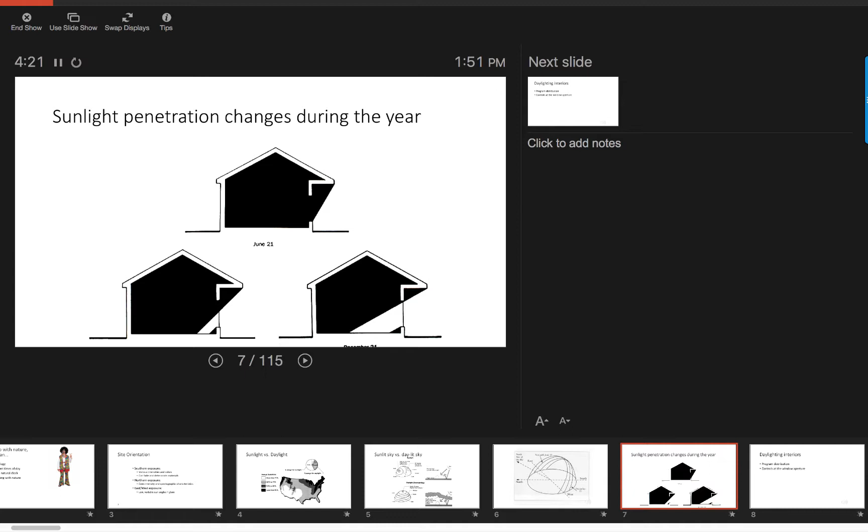So how does that affect the interiors? Why do we care about the outside of the building? We care about interiors. Depending on the configuration of your building, buildings can be designed to reject sunlight in the summertime and yet allow it in the winter by taking advantage of this change in altitude of the sun at different times of year.

The other thing is that when you are designing interiors, you have control over where the program goes and what happens at the window in terms of treatment. So, for example, and we'll do an in-class exercise on this, when you're programming a building, do you want a breakfast nook to have direct sunlight in the morning? And if it's an east or west facing window, would it be better to be east or west?

Because if it's facing east, you're going to get glare in the morning. That may actually be uncomfortable for a breakfast nook. Now, that said, that might be great for a dinner nook. So some thought would have to be given as to where you would distribute that piece of the program.

The other thing to consider, again, as an interior designer, you control the lighting. Hey, this is a lighting class. And there's a number of things that you can do, including switching where there are extra circuits by the windows, which shut off either manually or automatically if there's a daylight sensor that says, hey, there's plenty of light here.

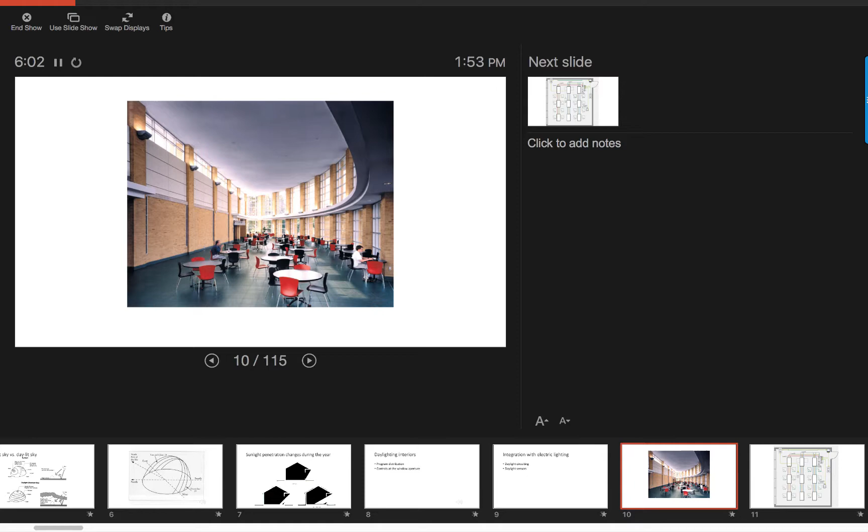Any corner of this space is adequately lit for whatever sort of activity might be going on there, which is mostly, it seems like, sitting around, munching or working on the computer.

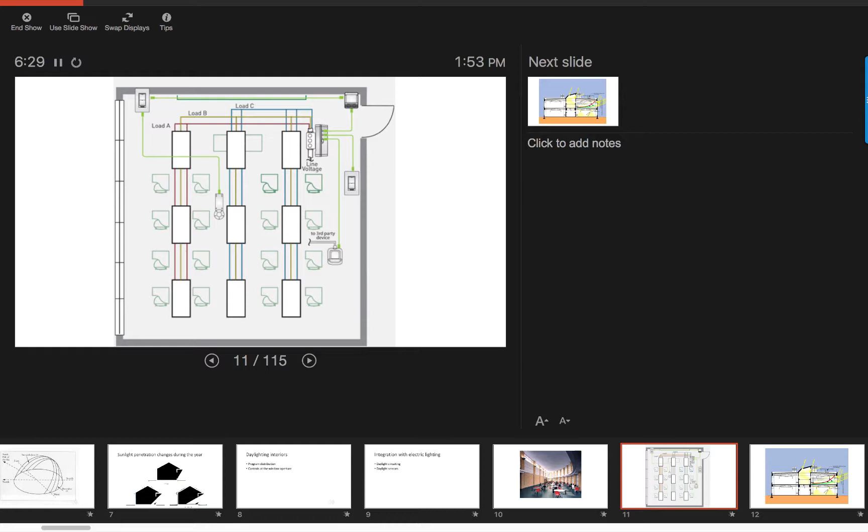So the dimming that I mentioned is typically called offset dimming, or daylight switching, you can call it that too, where you might have banks of lights on, say, 3 separate switches. One switch might turn them all on, and then one switch might turn off one circuit or another circuit. Okay. And again, those switches can be automatic or using daylight sensors.

Also, when you think of planning out a building, if you're getting into larger scale projects, things like atrium or atria are going to also be subject to the same sun angle issues. So any space facing on those atria, you'll have to really carefully study where is the sun going and how deep is it going to be penetrating into the building.

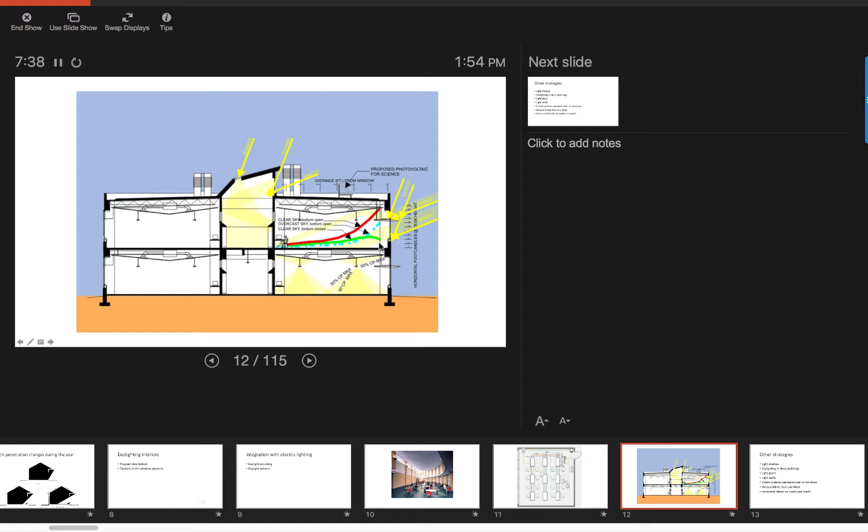Now, of course, the diagram dramatizes it, but you can calculate that, and this dashed green line represents actual calculated values of what you could expect at that particular time of year as for light levels. Obviously, it is still quite bright by the window, but can't avoid that because windows are just bright.

So anyway, there's a number of other strategies which you can use as an interior designer, which we'll look at here. These include light shelves. Obviously, skylighting is something that you can suggest as an interior designer. Of course, you'll want to make sure that you get somebody to look at the structure of the building before you start dropping in skylights willy-nilly. But it is great for deep buildings.

The example that I like that's convenient is Costco. They save a tremendous amount of money by skylighting, and they all use it as a rule. There's a couple of other things: light pipes, light wells, and then things like integrating the HVAC systems so that they run along windows and can act as, say, a reflector or to help in controlling the light.

Anyway, typically also when you're controlling light at the windows, vertical blinds are typically more effective on the east and west windows because they're better at cutting off those variable low-angle glare. Horizontal blinds on the south and the north are fine. Of course, you can use any type of blind on any window, but that's a sort of rule, or not a rule, a suggestion.

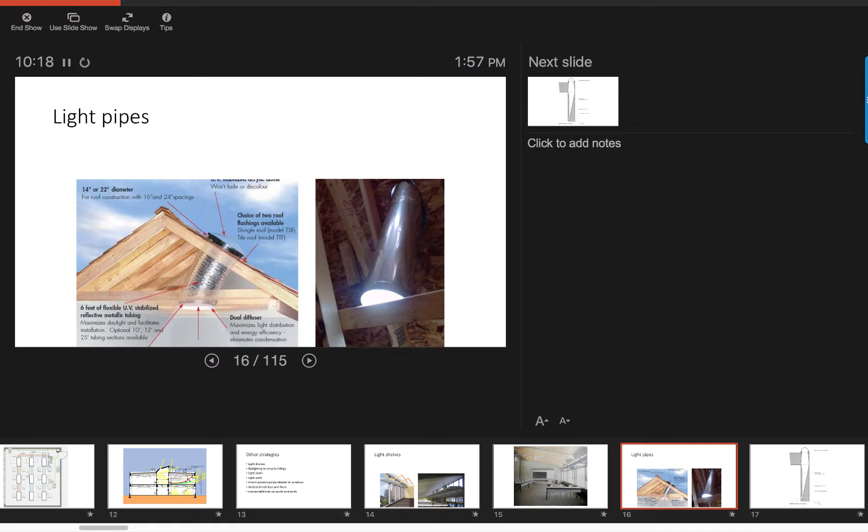So light pipes, they're just a product basically that you can buy. They fit in between the joists and the rafters. They're spaced to fit. And they're actually quite effective. I've used these in my own work, and they do a surprisingly nice job. What's terrific is when you put on an addition, say, and you've blocked a window to a toilet room, this can provide natural lighting in the toilet room. Of course, that makes you look healthier and is terrific when you're putting on makeup and other stuff.

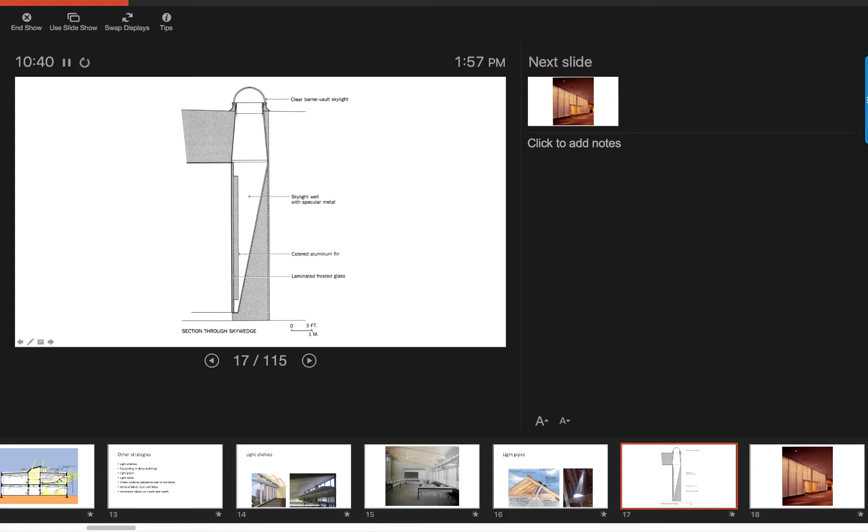And the advantage of this, in a giant convention center in Dallas or Austin or something like that, is that you get some variability. Even when a cloud passes overhead, the wall kind of changes, and it's a free, easy to install effect. You could even integrate electric lighting with this for nighttime. And then, again, like I mentioned, skylights.

I think we've seen these, and you can have fun with these, of course. And as I mentioned, integrating them with electric lighting so that you get a similar effect day and night.

One of the things about controlling daylighting, there are many methods. I've noticed that as you guys do your projects, almost nobody does anything on their windows, which is kind of sad because it's a big nightmare, frankly, or just a design opportunity. Of course, the glazing systems can help you in terms of the low E and all that. They can prevent heat or prevent heat loss. Glass coatings can do a number of things, including also prevent heat gain or loss.

But the thing that has the biggest impact on design is window treatments. Obviously blinds, draperies, shades, all those sorts of things. And what you don't want is the client to sort of add on some junky stuff after the fact. You really want to think these things through. If you're working with an architect, you can also discuss roof overhangs and awnings.

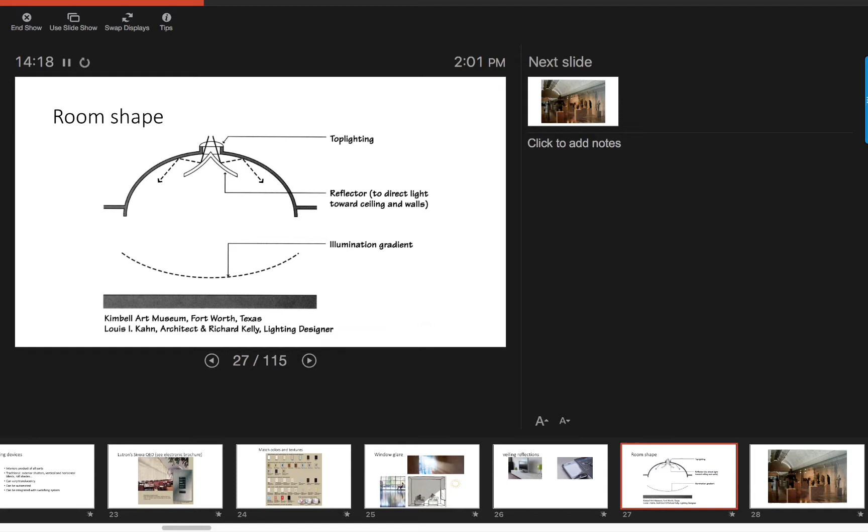This is the Kimbell Art Museum, the original one in Fort Worth, Texas, by Louis Kahn. A slot was designed in this barrel vault, and light comes through the slot and bounces off these scoops. So you get this kind of indirect lighting effect. In fact, it's almost like a double bounce. It bounces off of the scoop onto the arch, and then from the arch, or the vault, down onto the artwork. It's very nice.

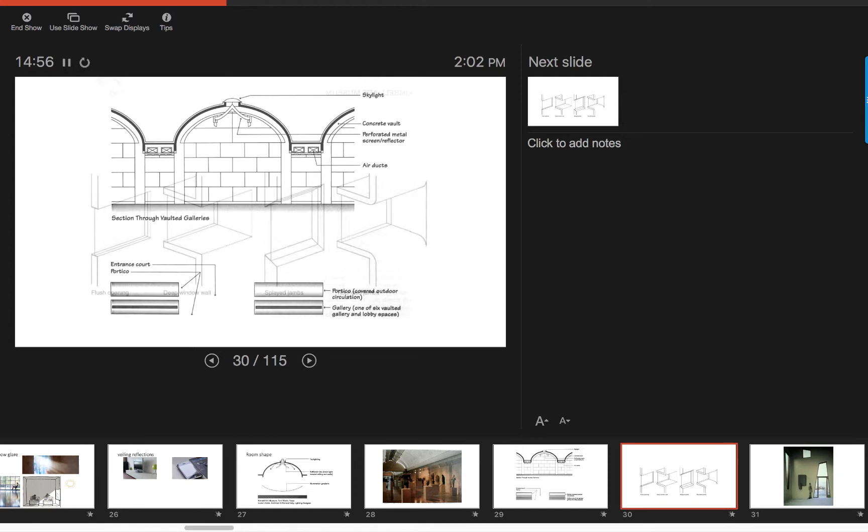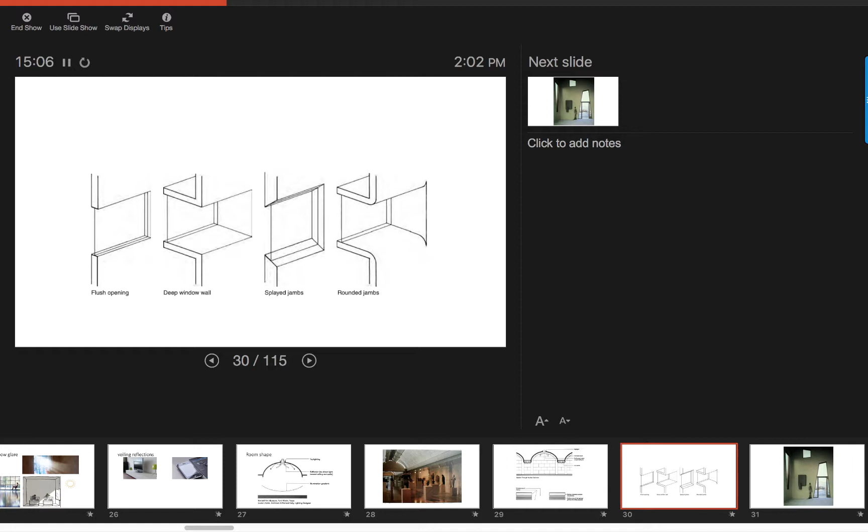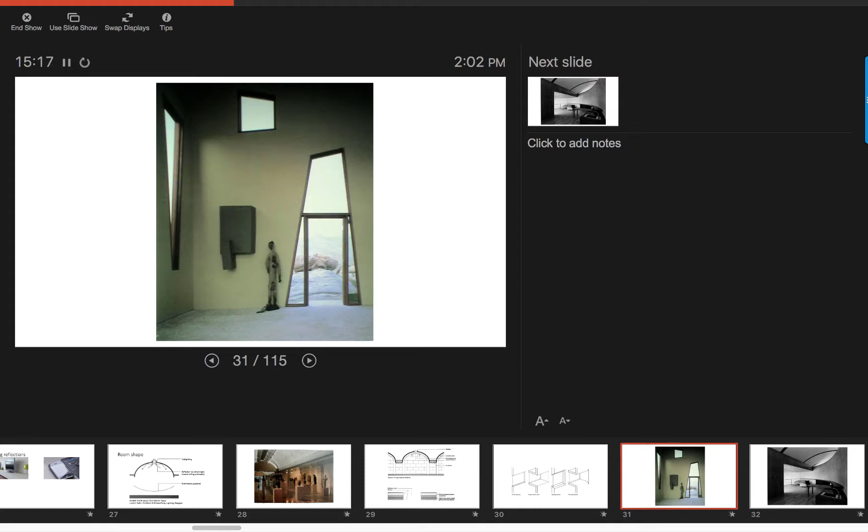They also did a good job in this design of integrating the HVAC into the overall planning. Again, when you think about lighting, you do typically think about HVAC because they're often happening up in the ceiling. Anyway, other things to fiddle around with, something like changing the shape of the aperture of the window. We can do this as interior designers. You may be stuck with the square window, but you can certainly have some fun with it on the inside of the building. And what's so magical about square? If you're working with an architect designing a new building, you can choose whatever sort of window you want.

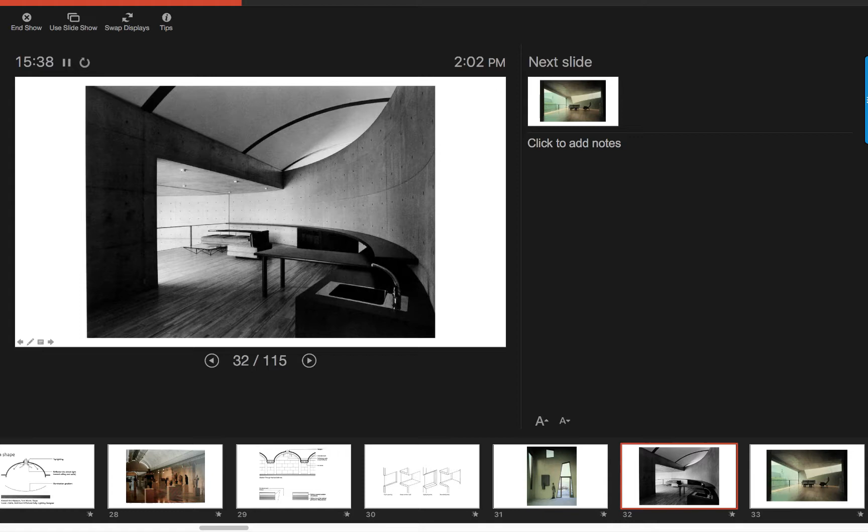And there's an architect named Tadao Ando, a fine architect from Japan who does a lot of work with daylighting. His spaces are super minimal. He designs them to have very interesting reflections and gradients of daylighting. The daylighting in his projects comes through these strange-shaped apertures in all sorts of different and unexpected locations. And there's usually some goal, either creating a shadow that's going to move over the course of the day or controlling a view through one place or another.

Whenever you're using daylighting, if you actually want to figure out if you're going to have usable daylighting, there's something called the daylight factor, and this is something you can calculate. And there's wildly complicated ways to calculate it, but you guys don't have to worry about that. All you have to worry about is the magic 2.5H. In fact, I'm sure that's going to be on the test. And because it's like the simplest formula you're ever going to see, H equals the head height of the window.

You have a 20-foot high window, 2.5H is 50 feet. That means that within 50 feet of that window, you'll probably have pretty decent ambient light levels from daylighting. As I mentioned, there's many other factors, especially the orientation of the building. But what this tends to lead to is the alphabet buildings.

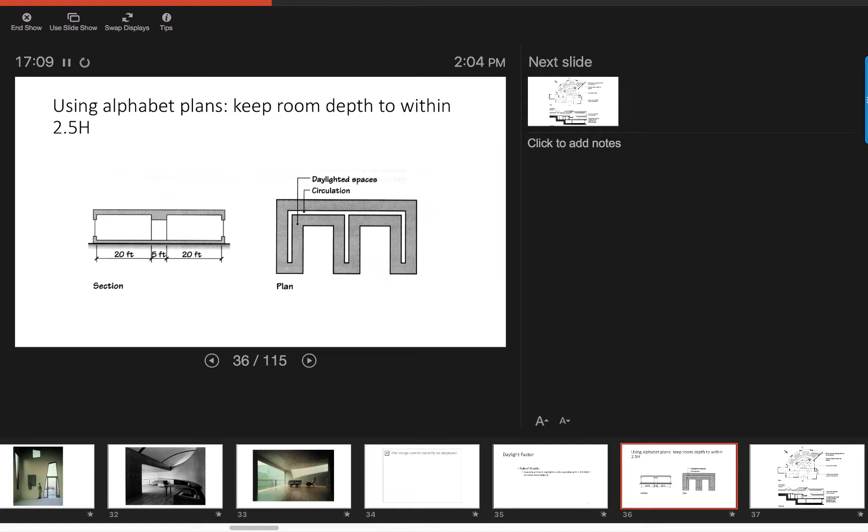And the reason that when you see old buildings that were designed for use with daylighting, they tend to look like a letter of the alphabet is because of the limitations of the 2.5H. Most of these buildings, if you sat down with a piece of paper, you could figure out they're all 2.5H, and they're all shaped like E's and L's and that sort of thing. Anyway, other people have used different ways of getting daylight deep into the building.

This is Alvar Aalto, and he has these daylight kind of cones, but he also has these very unusual scoops that are designed to work with the shape of the plan and kind of create interesting lighting that reflects throughout the space as the sun moves during the course of the day. The sun is going this way, and the reflections kind of spread it evenly in this fan-shaped space.

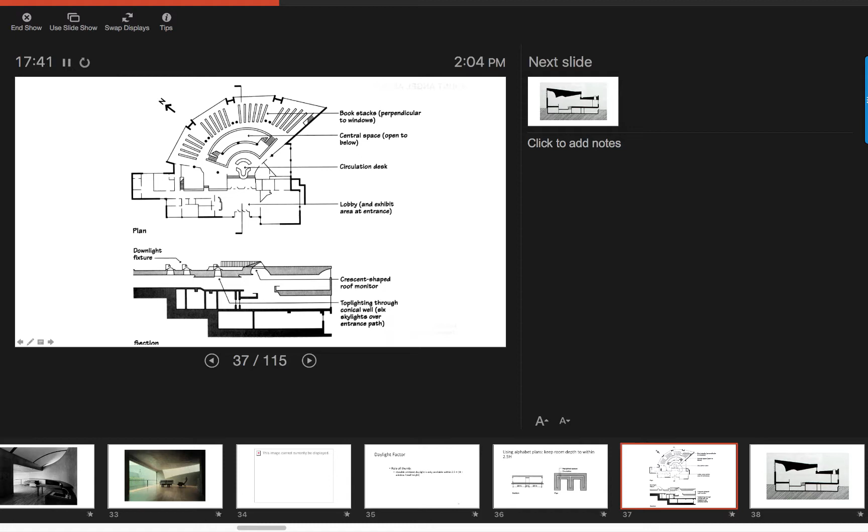And this is a section through those buildings, and you can see there's a kind of a parabolic effect. In fact, this is a double parabola. He also would do a lot of daylighting studies and kind of figuring out where the daylight would reflect. So anyway, just to take a look at one church as an example of a church designed around daylighting.

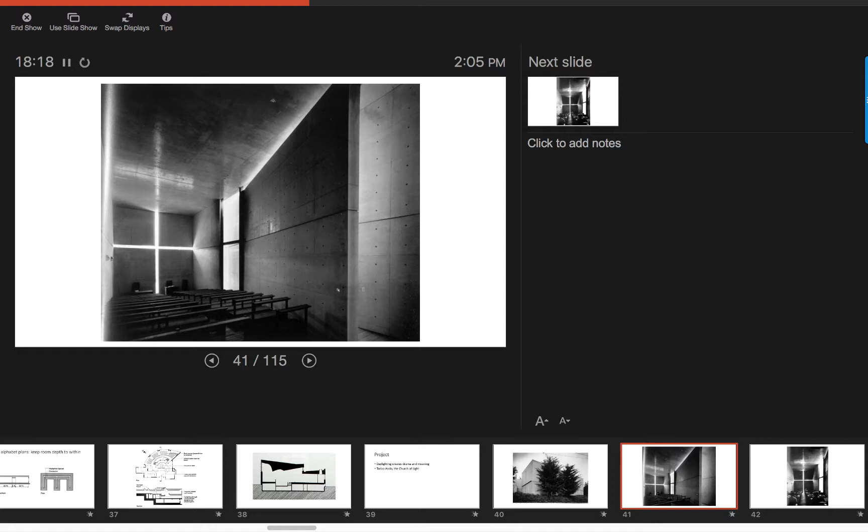This is Tadao Ando's Church of Light, and obviously those of you who are Christian might know that there's some symbology to the cross shape, and that's played on by making it a window. Obviously no stained glass in this particular tradition, but you can see it's just a very nice kind of symbolic, focus-grabbing use of daylight. And yet there's still enough daylight in the space to orient.

Basically, this space could probably operate without any electric lighting if needed, and it just highlights the geometry and the simplicity of this space. So, anyway, there's a number of terms that have to do with daylighting, which I won't go into every single one, but things to be aware of. And also be aware that when you are using daylighting, you can save money for your client by switching to daylighting, and these values can be calculated based on the electric rates in your region.

So let's chat about chapters 9, 10, and 11, which are historical light sources. Basically, we're looking at filament light sources, low-intensity discharge, and high-intensity discharge. And these, I'm actually gonna tone down the depth of the lecture here, just because we really don't need to talk about all of these lamps that much, other than to recognize them as historical.

But the things that we want to learn about these is, what kind of light output do they have? What is their efficacy, which is how much light do you get out of that source, and the color, the lamp life, other elements related to the lamp. The big thing is that as history has gone by from filament sources onto low-intensity discharge and high-intensity discharge lamps, it's all about increasing lamp life and increasing efficacy. Okay.

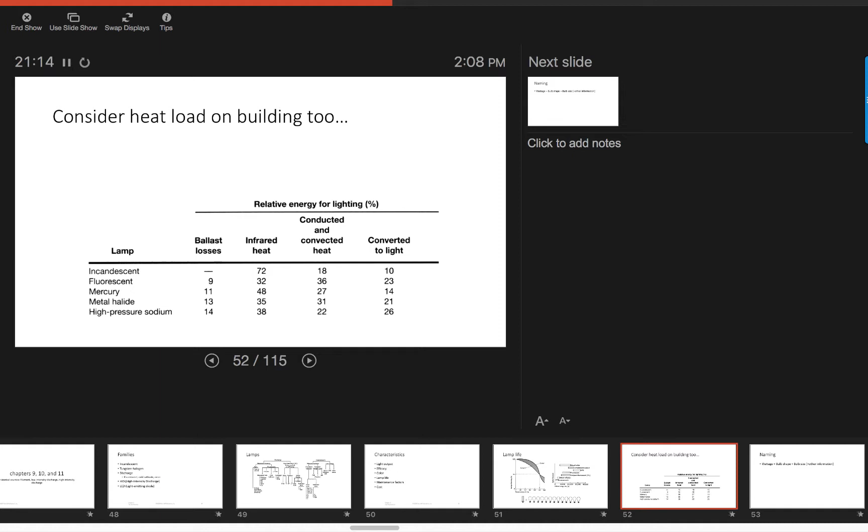So one of the big things to learn about historic lamps is you typically name particularly filament lamps by the wattage, the bulb shape, and the bulb size. So the typical wattages might be 25, 50, 100 watts. Bulb shapes we'll look at in a second, but the most common one is A. A stands for arbitrary, which seems kind of random to me, but that's what they use. And then the bulb size, interestingly enough, it's measured in the US in eighths of an inch. Why eighths of an inch?

I don't know. Ask Thomas Edison. But basically, what you end up with for a common lamp is a 100 A19, 19 eighths of an inch. That regular old lamp that you can go and buy at the hardware store that we see everywhere, that is an A19 lamp, and 100 is the wattage.

Okay, so let's look at a couple different features of the incandescent lamps. I don't know why I still have this animation in here. That's kind of silly. But basically, they're burning something. That's how the historic lamps work. I think I talked about that a bit in the historic lecture.

Big thing to recognize, this is the bulb. And the bulb is typically filled with a vacuum that has a filament. That's how they all work. And you can get them in a million different shapes. It's amazing. This is just touching the surface here. It's amazing how many incandescent lamps there are out there. In fact, a little bit of trivia here, a three-way lamp has two filaments in it, one for the lower wattage, one for the higher wattage, and then one where they're both on. So there's a little trivia.

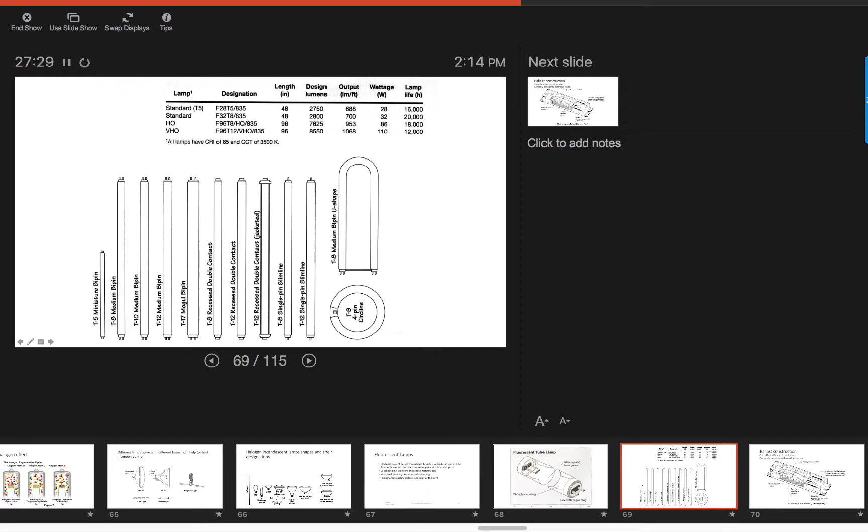So, fluorescent tubes come in a number of sizes. Typically, they are labeled T for tube, and then the dimension in eighths of an inch. So T5s, I believe somebody discussed that in one of their precedent studies. That's 5/8 of an inch in diameter, whereas a T12 is 12/8 of an inch. And there's different size lengths of lamp and also bulbs. Typically 4 feet and 8 feet are the sizes we use here in the U.S. So the ballast is also a factor with the fluorescent lights. We're not going to really worry about ballast so much, other than to say that they exist.

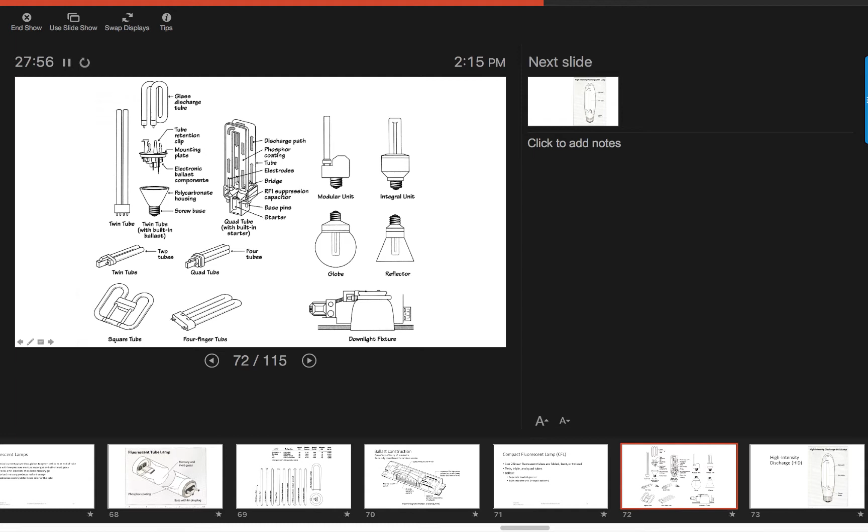Compact fluorescents are basically fluorescent tubes that have been shrunk and twisted around to fit into smaller light fixtures, and they're meant to replace incandescent lights. They're basically garbage. I really don't like them. They take a while to warm up. The only advantage they have is that they were this nice transitional technology while we were trying to save energy, but before there was a higher efficiency option.

High-intensity discharge lamps are another high-efficiency option. The way these work, as opposed to the low-intensity discharge, which is fluorescent lamps and neon, these often have a tube inside, and instead of being hollow and filled with a gas, often the tube itself is what they're arcing electricity across. They are super bright and have good optical control, but the color rendering is not so terrific.

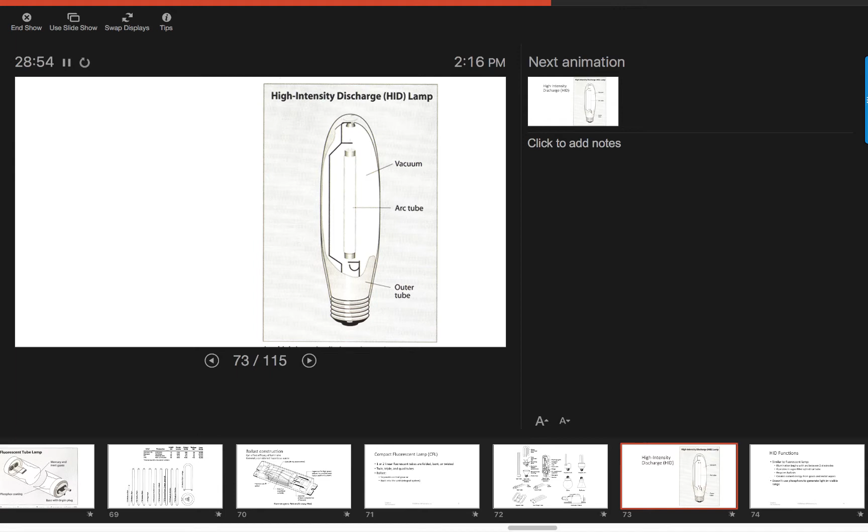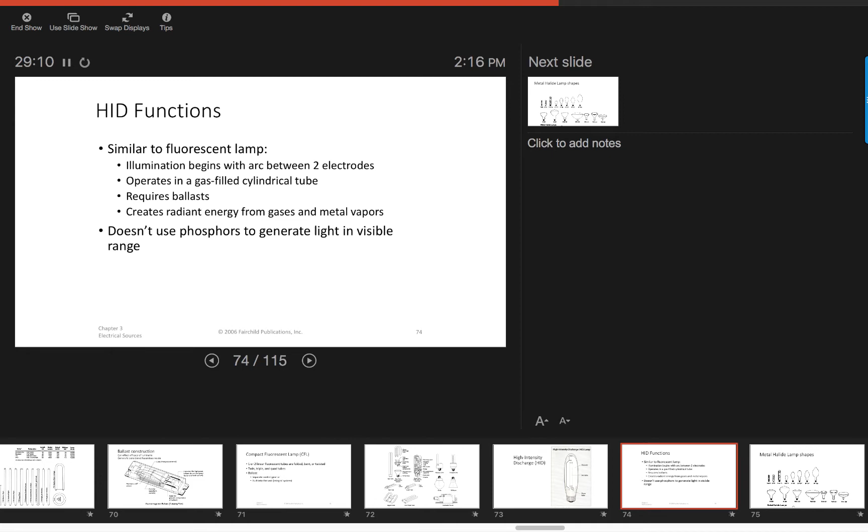These are the kinds of things you see in gymnasiums, for example. In fact, at old Endicott College, we have HID lamps in our gym. They produce a tremendous amount of light, but they have a giant, very heavy ballast. In fact, you often need a little motor connected to it to bring that thing down so you can change the lamp. They also come in a variety of shapes, and you can get them with high degrees of optical control.

So they can be nice for things like lighting a facade, where the color rendering isn't quite so important. One thing to consider with all of these light sources, but particularly with the HID sources, is they have what's called a restrike time. Think of a baseball stadium: if the lights go out by mistake due to a power failure, it can take 10 minutes to start those again.

So those are historic light sources. I know the book has full chapters on them, but I feel like we don't need to know as much about them as we do about LEDs, light-emitting diodes, or solid-state. Whoops, I cut my text off there. But basically, the thing about LEDs that you need to know is that it's goodbye incandescent lighting. LEDs are going to replace pretty much all forms of electric lighting, except possibly some HID lights, because they are so efficient and easy to control.

They typically, as we might have discussed in class, are these little flat chips that glow, and they often encase it in some kind of lens-like device that spreads the light. So again, here's the illuminator. It's a flat chip. One thing to consider, here I'll use my little pen, is that light can only go out from that surface. It can't go down from the surface. So it's not omnidirectional. In fact, you don't even get much light going sideways. It's almost exclusively going perpendicular to that chip.

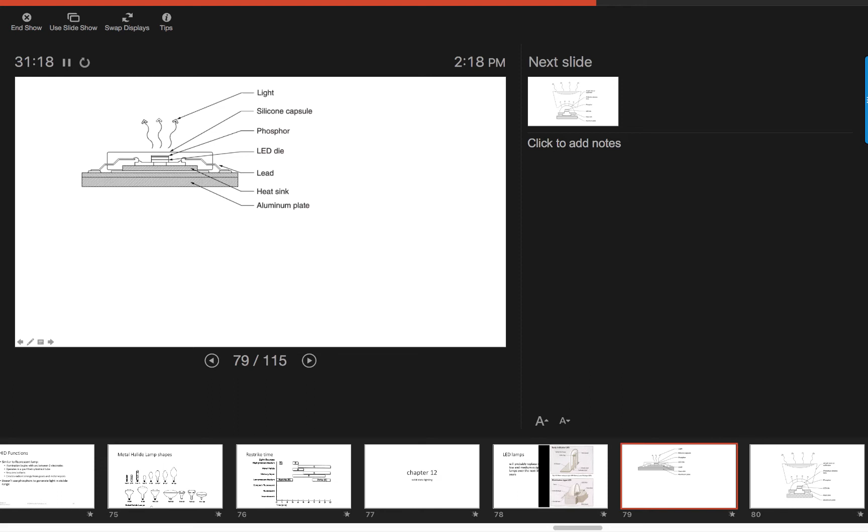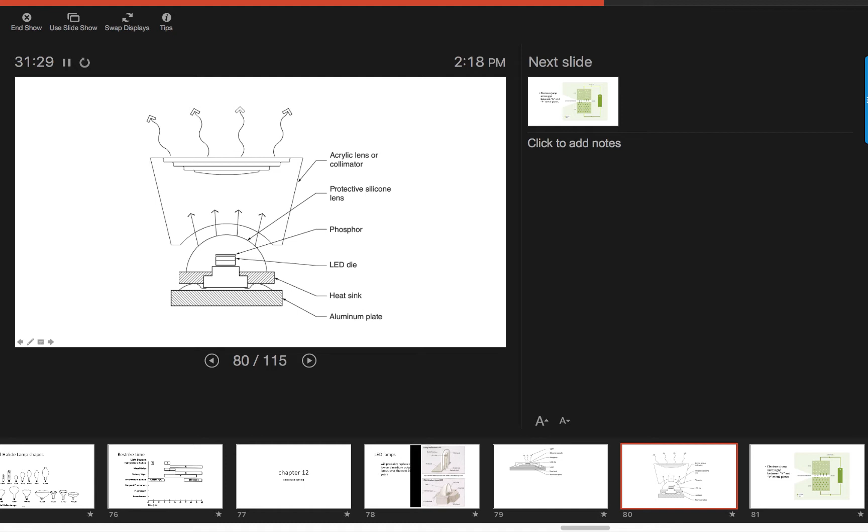The way these work is super complicated. But basically, there's a kind of heat sink, and this circuitry is printed in layers onto a chip. As they add more on it, this thing gets deeper than it is wide. If you're wondering about the physics of it, well, I don't really understand the physics. There's something about P and N plates, and electrons jumping from one to the other and emitting light when they do that. That's about as well as I understand it. The basic idea is that this chip is what emits the light.

Okay. LEDs are not easy to just plug in. They're very sensitive to voltage and current. So most of them have what's called a driver, which essentially is a ballast. The driver controls the power that comes out, both in voltage and in current.

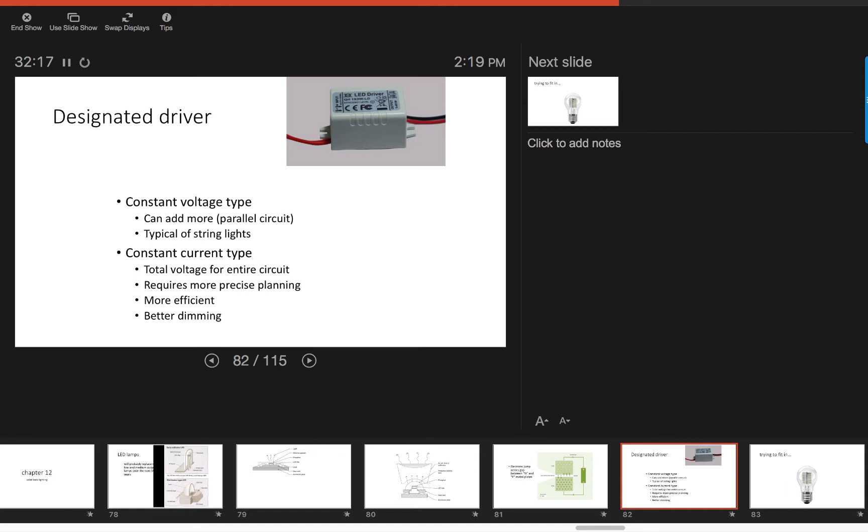However, if you have a light fixture by the side of your bed that has a shade, if the shade is kind of shaped like this, well, there's going to be no light down here. The shade won't look correct. So anyway, each of these, as they do their hijinks to get the light source to look like it's supposed to, has its advantages and disadvantages. And that's something which is just based on the fact that we have all these old pieces of equipment that we're trying to use LEDs in.

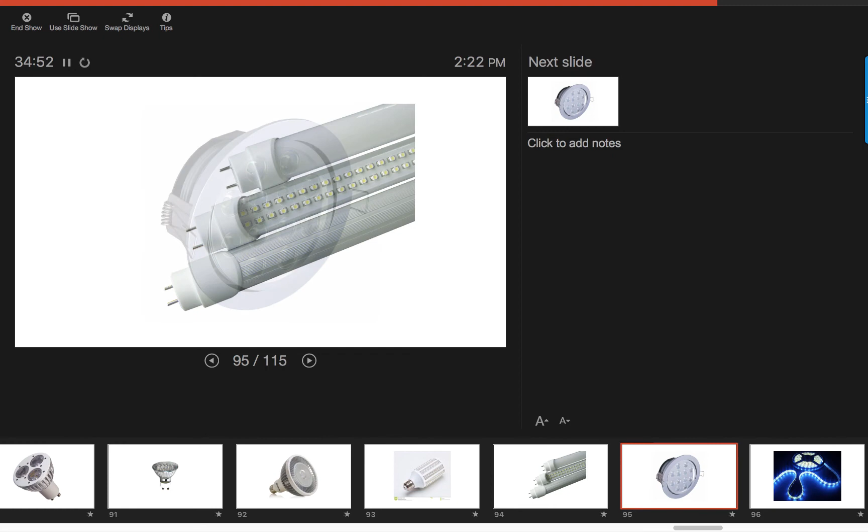Even fluorescents can be replaced. Of course, the typical thing here to worry about is getting those LEDs facing in the correct direction. Once again, LEDs, unidirectional. Fluorescents, sort of omnidirectional. They're more of a linear source. So anyway, other things you'll see, this is a screw-in lamp that has an adjustability to it. So you could screw it into a recessed can, and now you can actually focus the lights a little bit.

The one that LEDs excel at, and is a nice design technique, are these ribbon lights. Essentially, they're super flexible. They can have any degree of brightness that you want. You can control the light output and the color temperature, so they're super handy. And then you have other things like in office ceiling systems. You can still get troffers with a lens on them, so you don't have to rip down your entire ceiling to replace them. So, in the 21st century, I think that the best way to approach using LEDs is to integrate the LEDs with the fixture.

LEDs, because it's a chip, you can squeeze it into really thin places. And so different types of light sources can take advantage of that. You don't need to have these screw-in lamps anymore. And you can actually use that as a kind of design aesthetic, depending on what you're trying to accomplish.

So to kind of go over the advantages of LED, you can make them into any kind of bulb shape if you want, incandescent or fluorescent. They have an incredibly long life, 20,000 to even 100,000 hours. This is opposed to, for an incandescent lamp, about 800 hours. For a fluorescent filament lamp, that might be 1,000 hours. For a fluorescent tube, it might be 3, 4, or even 8,000 hours.